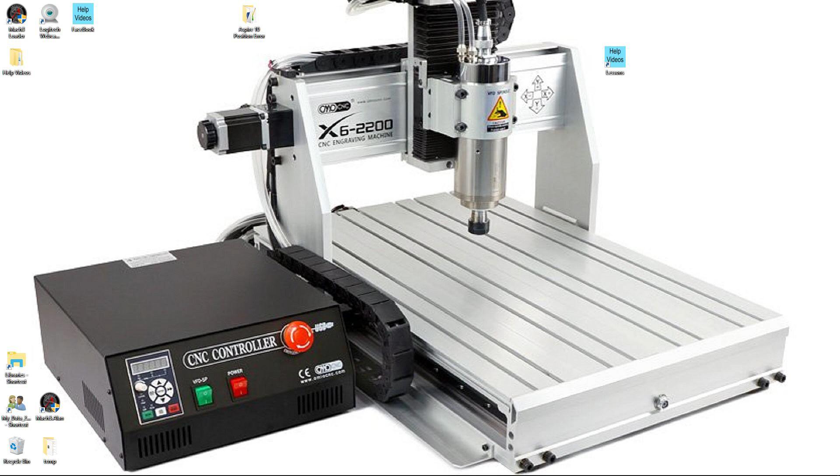Let's start to sort things out, our new layout. This project is much longer than I thought. I hope you are still with me. Let's start to put everything together.

Next, cycle start, feed hold and stop. Select them, hold Ctrl and click the G-code window, then click Align Right, select the buttons and click Center vertically.

Select the programming buttons, and move them over to the left. Move the machine buttons in between the two sets of buttons.

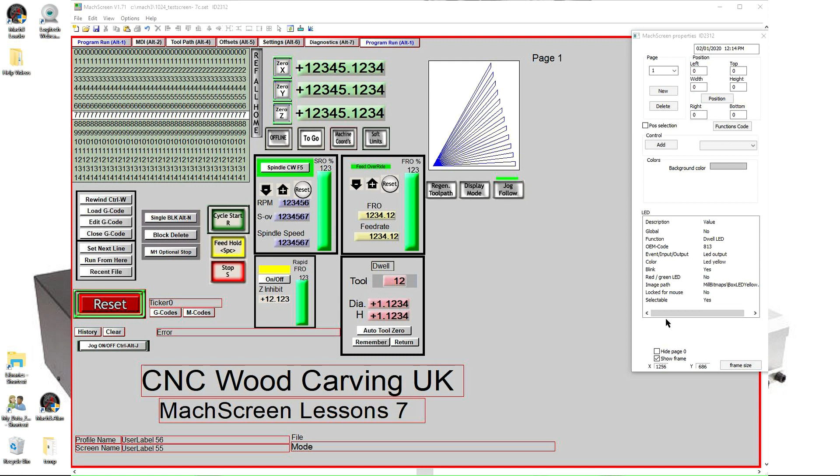We can now tidy up a little. Unfortunately there is no group function, so all items remain independent.

Before we start on the toolpath window, we must make some room, so move the Regenerate toolpath, Display Mode, Jog Follow button, and the LED.

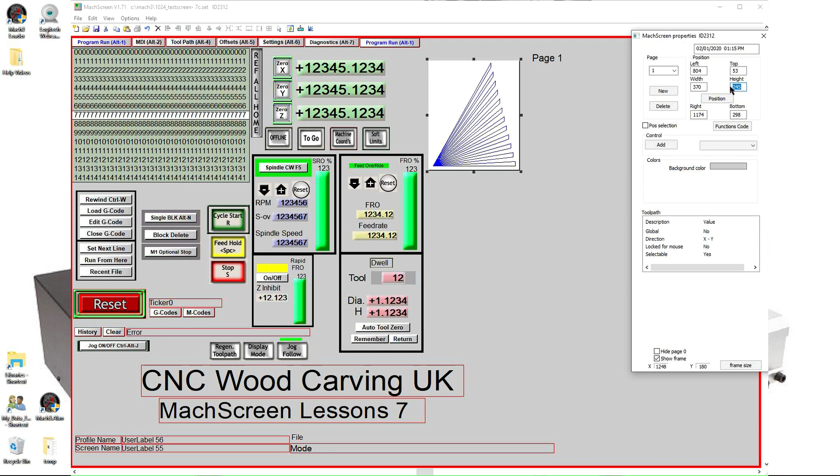Next let's play with the toolpath window. My hobby CNC has a table size of 370mm x 570mm, so let's set the window to width equals 370, height equals 570.

Of course, if you have a much bigger CNC, you can scale the sizes so the entire bed fits the window. If you have a 4x8-foot CNC, width equals 4 times 12 times 10 equals 480, height equals 8 times 12 times 10 equals 960. Let's see what that looks like.

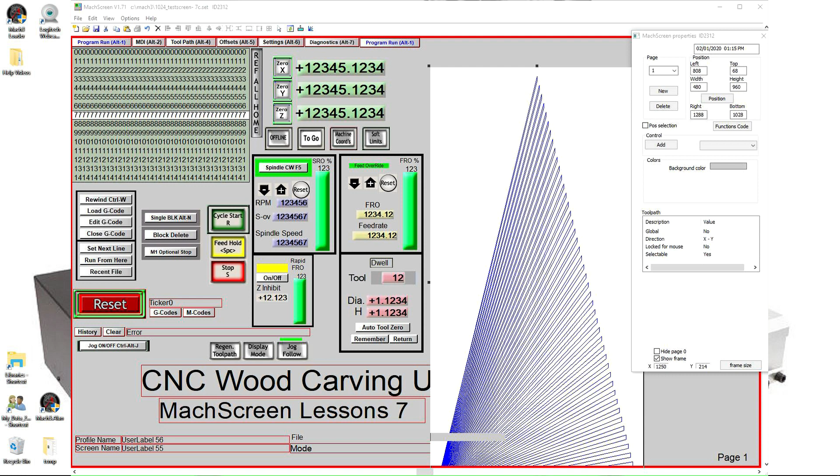A wee bit on the big size. Now we must position it where it can fit. The second problem appears.

Page 0 controls interfere. This is where we must make a decision, to change our toolpath size, or move components on page 0.

Take note of the file, error and mode labels. Let's see what happens. Select page 0, move the error label closer to the clear button, move the mode up under the two buttons and the label. Go back to page 1, and move the file label as well.

Now we see the first problem. The jog-on/off Ctrl-Alt-J and other buttons are already there. Move jog-on/off Ctrl-Alt-J.

Now switch through all the other pages to see the damage that we have done. Oh well, not too much that we cannot handle. However, this shows we must be careful when moving things on page 0.

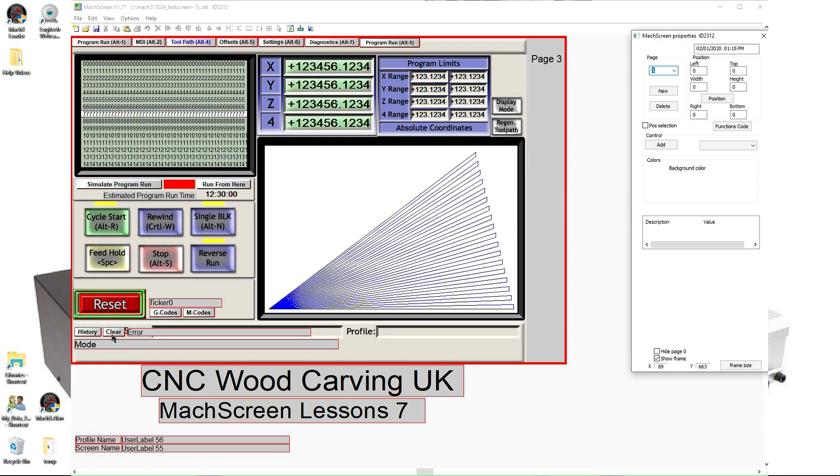By now you should see you can do anything to customize your Mach 3. Customizing buttons, LEDs and images will be the subject of the next lesson.

Now save and close, then load Mach 3 and load 1024_testscreen.set, then thoroughly test all controls before switching on your CNC, and letting a machine operator who may not be familiar with the whole program.

This is why you may want to remove controls from a particular page, to stop fiddling.

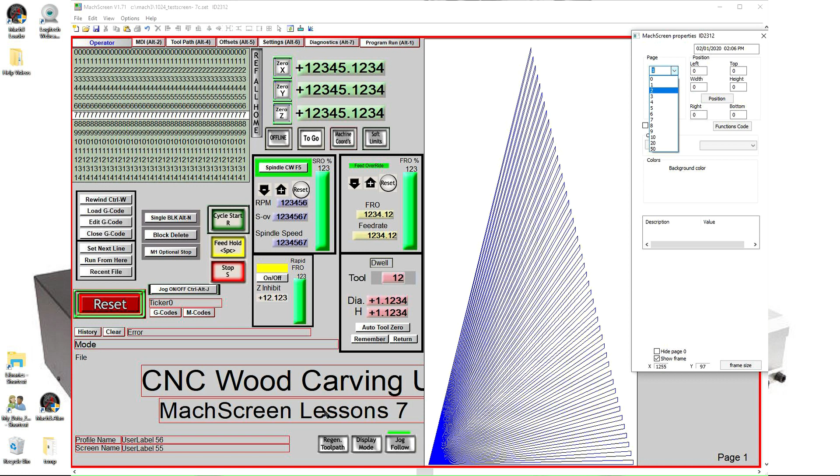As a last note, once I remove the two labels CNC Wood Carving UK, and MachScreen lesson, there will be more room to play with.

The worst and longest part of designing your own screen set is testing. Load Mach 3, and load 1024_testscreen.set, as you can see our screen is a little bigger.

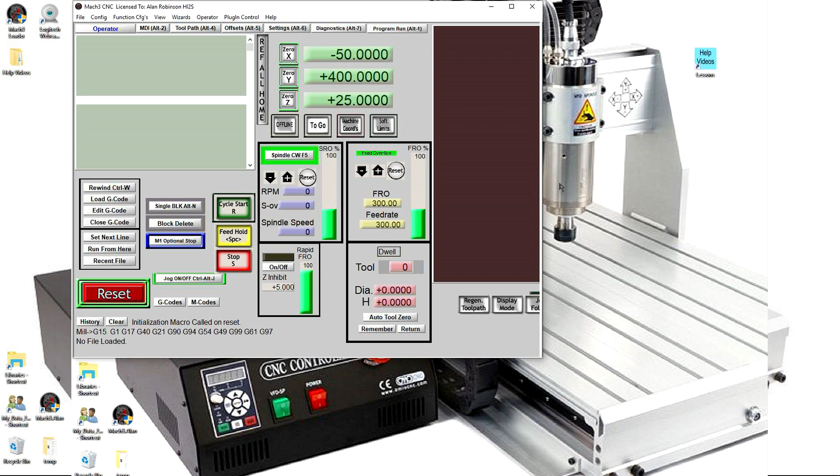Push a few buttons to see what happens.

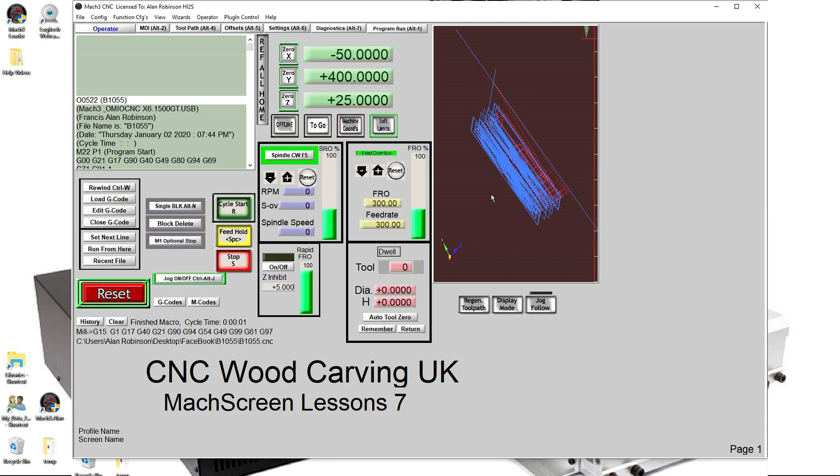If we now go to the other pages, we can see how much damage we have done by moving bits on page 1.

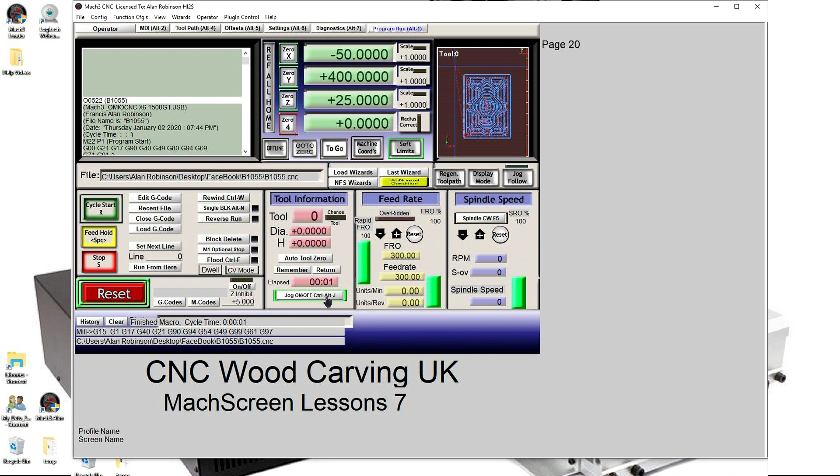Oh dear, looks like we have more work to do.

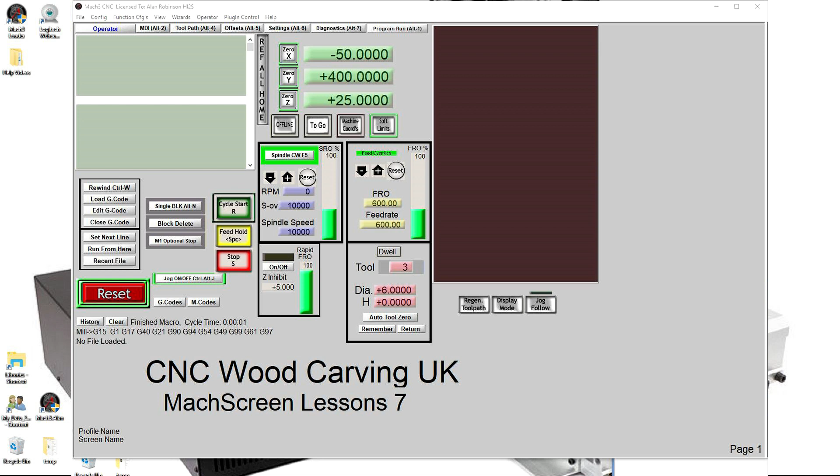The next lesson will be mostly graphics related, custom button and LED designing. Once again I must remind you, never play on your working screen set, and have fun.